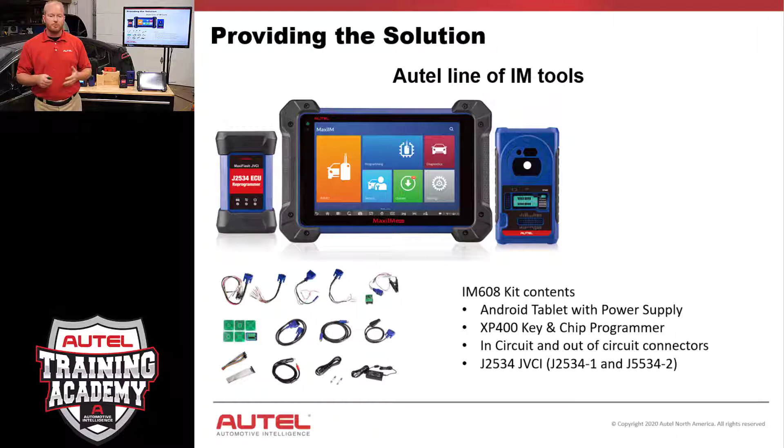So how does the Pro stack up to the IM608? Well, we have all the same functions as the IM608, and it actually comes with the same tablet and the same J2534 device. But here is the difference.

The difference is in the XP400. The XP400 now becomes an XP400 Pro. Now, it looks the same on the outside, but there's a whole lot of different going on the inside. There's been a lot of changes and upgrades to the circuitry, the chips, the components, and the wiring inside that XP400 Pro.

So with the addition of the XP400 Pro, now we can do BMW EWS3, Mercedes-Benz W209, NEC, and a tremendous addition when it comes to reading our components and our chips. Over 60 new chip types and over 440 total.

We added MCU chips, we've added odometer, we've added engine ECU, immobilizer, added the ability to do Land Rover and Jaguar, Volvo smart keys, and one of the newest updates is Toyota 4C that is coming to a tool near you. So we've added a lot of functionality by adding that XP400 Pro.

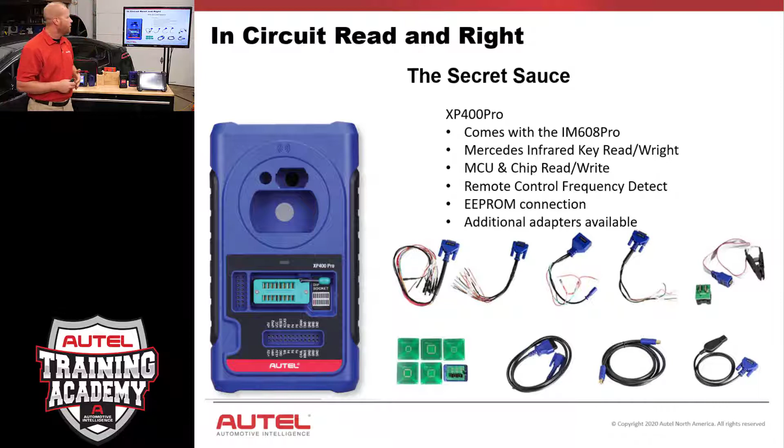And that XP400 Pro really is the secret sauce to this whole equation. The XP400 Pro comes with the IM608 Pro, or you can buy it independently, which I'll show you here in a second. And it has the Mercedes-Benz infrared key and MCU, EEPROM, and all the adapters that come with it.

But maybe you already own an IM tool and you don't want to spend the money on a new one. I know, I get it. And we wanted to make sure that that didn't happen. We wanted to make sure that you could get the new functionality of the IM608 Pro without having to go back and buy a brand new tool. If you just bought an IM608, there's no problem. We thought of a solution for that as well.

So the XP400 Pro can be added to your IM508 and your IM608. That's right, this can be added to your IM508 to add all the European coverage plus all of the new European coverage that we just talked about with the IM608 Pro. This can be added to your IM608 to become a Pro, and that gives you all that same functionality. So with that one little device added to your tool, you now have all the same functionality as a brand new tool.

Now, the IM608 and the IM608 Pro are going to be running on the exact same tablet and the exact same software. So if you are an IM608 owner and you get an indication that you have to have a hardware upgrade, that is why. You're trying to do something that the old XP400 is not able to do with its current chipset, and the XP400 Pro can. So they're recommending on the tablet that you upgrade that to be able to do that functionality.

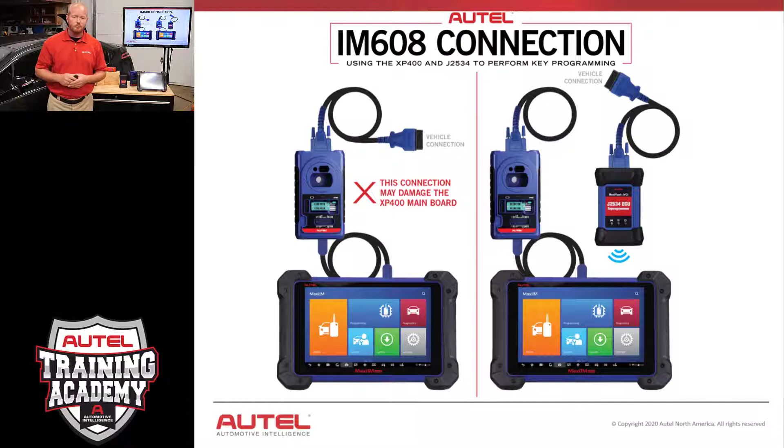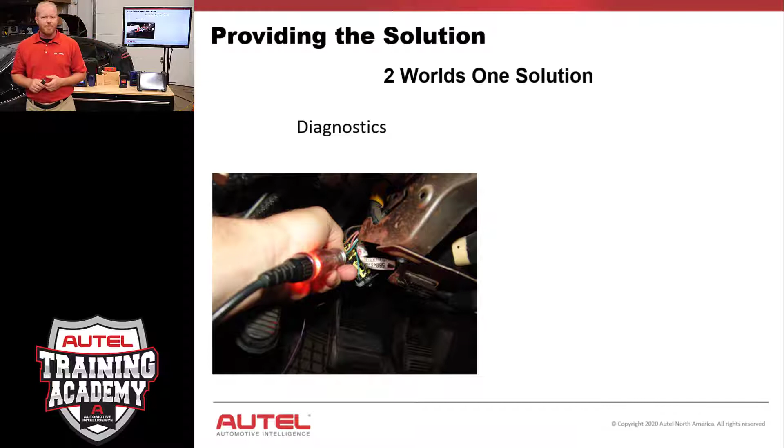So, providing the solution, there are two worlds that are colliding at a very rapid pace right now. The first world is your mechanic, and the mechanics that are sticking test lights in places that test lights aren't supposed to go, jamming it in circuits and trying to see if there's powers and grounds and just messing everything up. And then we have the key slingers, right? We have the locksmiths that have to come in and save the day and try to fix all that. But both of those worlds are really combining now.

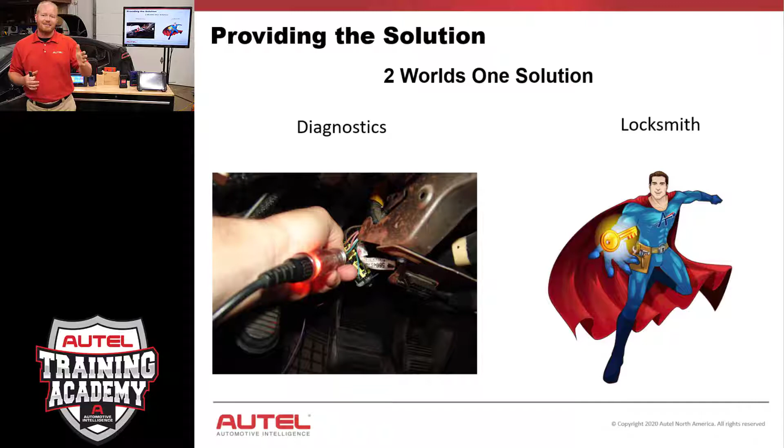No longer can we talk about a security system in an automotive car without talking about the network of the modules and all the other systems in the car. When we look at some vehicles, we can see that the security goes well past just the immobilizer box, into the dash, into the body control module, even into the transmission control module. So security systems are going much broader in a vehicle to be able to program those keys. So even in the locksmith world, we have to be able to access that diagnostic side and make sure that the systems are all working together.

If you're the guy that says, I'm just slinging keys and I don't need no diagnostic tool, you are the guy that's fading into the past. Being able to do automotive locksmithing is now going to require more and more tooling, more information, and more access to that vehicle. So make sure that you're staying current with the systems and the training on these systems.

With the diagnostic side, we're going to talk about pre-scan and post-scan. This is something new to the world of locksmiths, and it's something I highly encourage just to protect yourself. A pre-scan and post-scan is basically where we go in and scan that vehicle before we do anything, scanning for codes and issues.

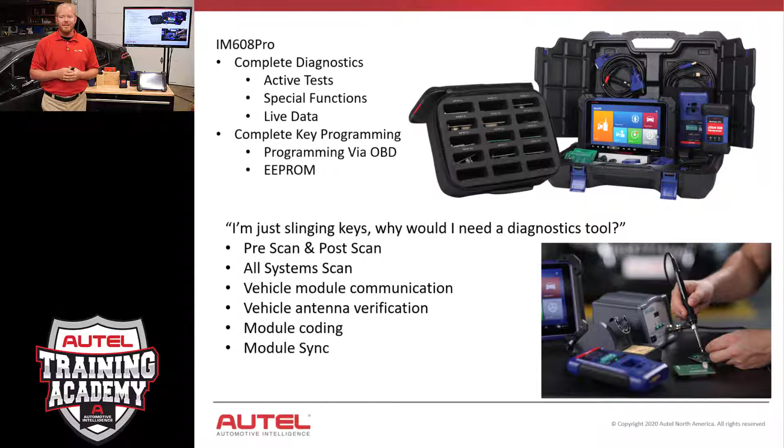So let's take a look at the IM608 Pro and what it looks like. Here's our main screen for the IM608 Pro. You see you have your immobilizer, programming, diagnostics. These tools are super duper easy when it comes to updates.

You push the green button. And I'm going to tell you right now, these tools update about every week to every two weeks. The number one call to my tech support line is 'this function doesn't work.' Did you update your tool? No. They update the tool and now it works. So keep your tool updated - it's as simple as pushing a button.

So the first thing we're going to look at is diagnostics. When we look at our diagnostic screen, we're going to see the AutoVIN up here in the top left corner, and that's going to give us the ability to auto detect that car.

So we're going to select auto detect. It's going to go in and start communicating with that car, asking for information like year, make, model, VIN, engine size. It's going to try and get all the information it can out of that vehicle. Whenever we do that, it's going to list all that information, including VIN, year, make, and model, all that good stuff.

From there, we can do an all-system scan. Whenever we do an all-system scan, it's going to go through every module and talk to it. It's going to say, are you here? And do you have any codes? From there, we can see any codes that are available by clicking on Report.

And that is also how we do our pre-scan and post-scan. We can select Report, get all that information, and do a wireless print or email, your choosing, of that report out to the outside world.

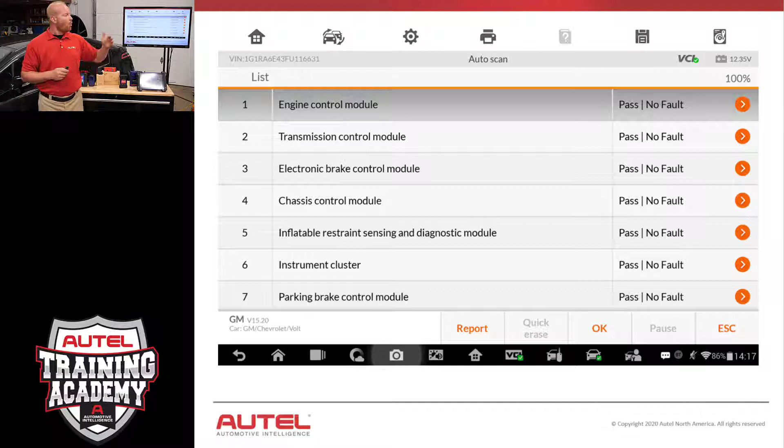Whenever we're in the diagnostics, we can click on the little caret there on the right-hand side, and that will take us into live data. When we're in live data, we can change the way we see that information.

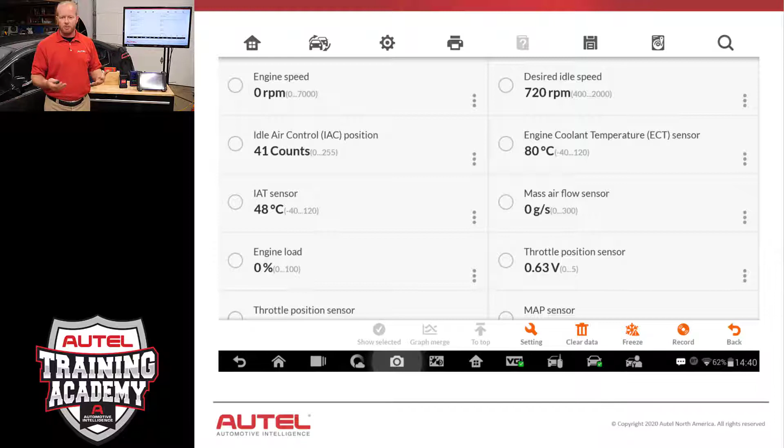So let's say we just need to see how many keys are programmed to this vehicle. No big deal, we can do that in a numerical sense. But if we have other issues we're trying to help a customer with or trying to decide, we can also change those to graph. We can graph merge, or change those to a dial or a bar graph.

If we need to put multiple graphs on top of each other on one screen, we can make sure everything is syncing and talking to each other. I'm not telling you to become a mechanic. I'm not telling you to become a diagnostician. I'm telling you that it's available if you get stuck and you need it. You have it on the Autel IM608 Pro.

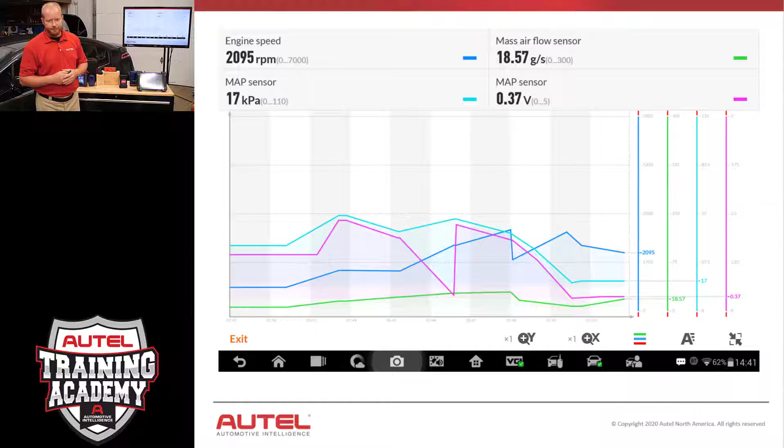So let's go back to the main screen. On the main screen, you're going to see Immobilizer and Programming. Programming is really where we're going to focus the EEPROM side of the world and doing our chips and components. We're going to go into Immobilizer, and this is really where we're going to focus the majority of our time on programming keys via OBD.

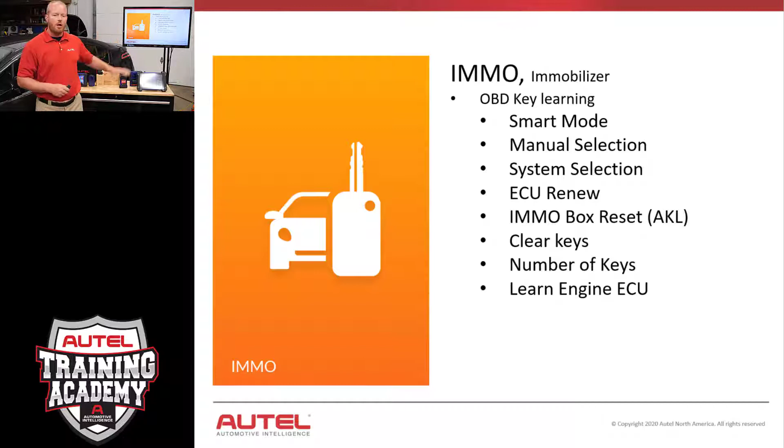We have the smart mode and manual mode that we talked about before, the system selection, ECU renewal - all those functions are going to be underneath the Immobilizer icon. Whenever we select the Immobilizer icon, it's going to come into a main screen. This particular one is on a Toyota, and you're going to see all the features and functions you can do.

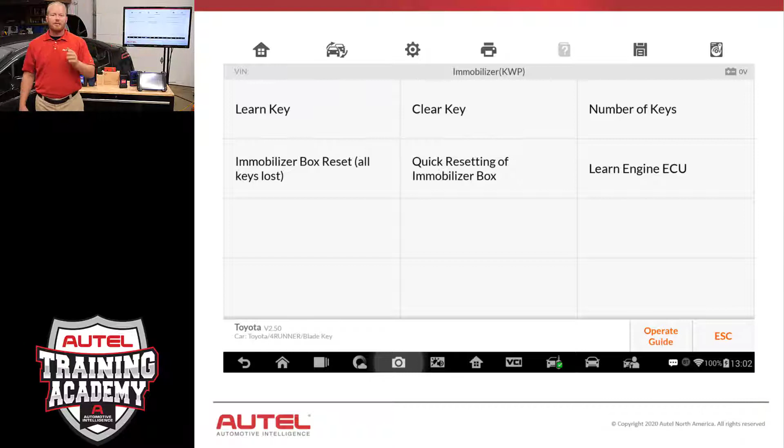One thing I'd highly recommend, if this is new to you and you're just getting started, is to go down here to where it says Operate Guide. If we select that Operate Guide icon, it's going to give us information about that vehicle. It's going to tell us what everything on that previous screen meant - the definitions of all those terms, and what we do whenever we click on that term.

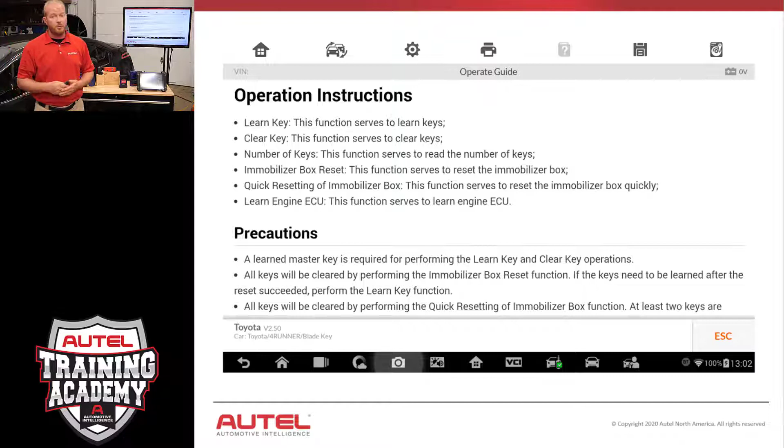We're going to give you precautions. Like on this one, for instance, on a Toyota, a learned master key is required for performing a key learn. All those precautions are going to be in there to give you the most information before you take the next step. Again, this is so you can make sure you know what you're doing, or to talk to your customer to make sure you have everything in place to do that next step.

When we cycle down, you're going to see more Immobilizer information - the chip number, key frequency, what type of key it is. This one in particular is a blade key, and the maximum number of keys supported.

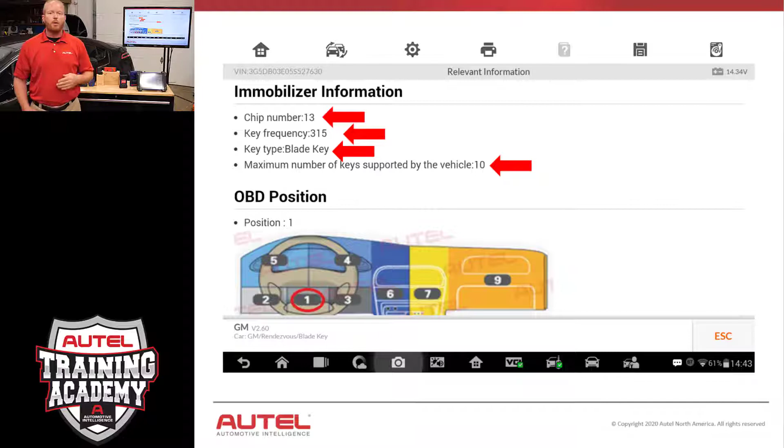Whenever we look at like a Hyundai Kia, they have a maximum number of keys that's very low. So we want to make sure we know how many keys are programmed into that vehicle and what the maximum number of keys are to try and save ourselves some time and hassle. We're also going to show you what that key looks like to make sure we're in the correct selection. So all that is built into that Operate Guide on the tool just to help you as a technician or as a locksmith to do this part of the process if you're unfamiliar with that specific vehicle.

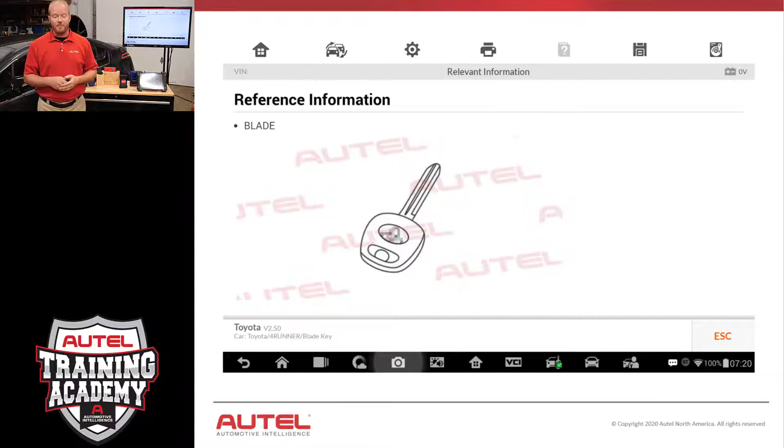All right, let's talk about accessories and how all these accessories tie together.

If you are the proud owner of an IM100 or an IM508, you can add the XP400 Pro to your IM508 or IM100 to be able to add all those EEPROM and European functionality. Then you can add on the KPA set to do the key programming accessories. If you have an IM608 or an IM600, same idea, you can add the XP400. Once you add that, you can add the KPA to be able to add those extra functions. We're not going to brick your tool, it's not stop, do not pass go. It is just adding an accessory to your tool to add those extra functions if you want them.

The second one is the APB112, and the APB112 is this little cute guy right here, and that gives us the ability to emulate the keys on a Toyota. So that is a key emulator, for our 4D chips, and that will work with your XP400 or the XP400 Pro as well.

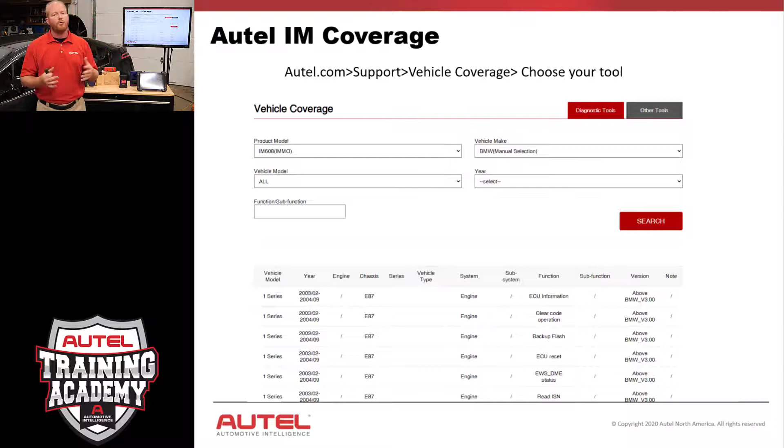The first way to see our coverage is by going to the autel.com website. If you go there, on the drop down you'll see one that says support, and then vehicle coverage. You can choose your tool, whether it be an IM508, IM608, or IM608 Pro. Once you choose your tool, you can choose what brand and what specific model of vehicle you want to see, or you can see all of them. Then it'll tell you what we can do in that specific vehicle, whether it be all keys lost, add a key, erase all keys, immobilize or reset. All those functions, we're going to show you how to do directly on that website.

So I hope that helps. I hope that cleared up a little bit of the confusion around the new IM608 Pro. The IM608 Pro just adds more features, more functions, more benefits, and more functionality for your EEPROM world. With that new XP400 Pro, that gives you the ability to do that extra functionality. It's really built into this box right here.